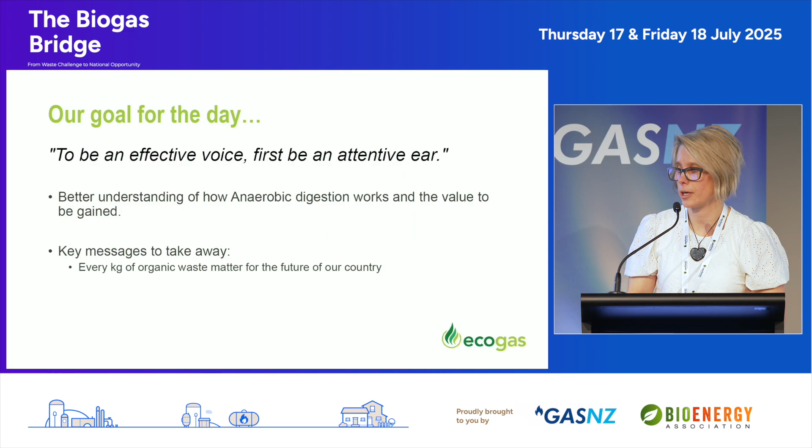And not many people will know this, but back in the 1960s, 1970s, there was a research group in Invermay down in Dunedin that was tasked by the Ministry for Agriculture and Fisheries to develop a technology that would convert agricultural waste to a vehicle fuel. And so New Zealand was actually the pioneers of biomethane into vehicle fuels. And there were people from Sweden and Scandinavia coming to Dunedin to learn. And so we were there, and then we lost the momentum and kind of took our eye off the ball.

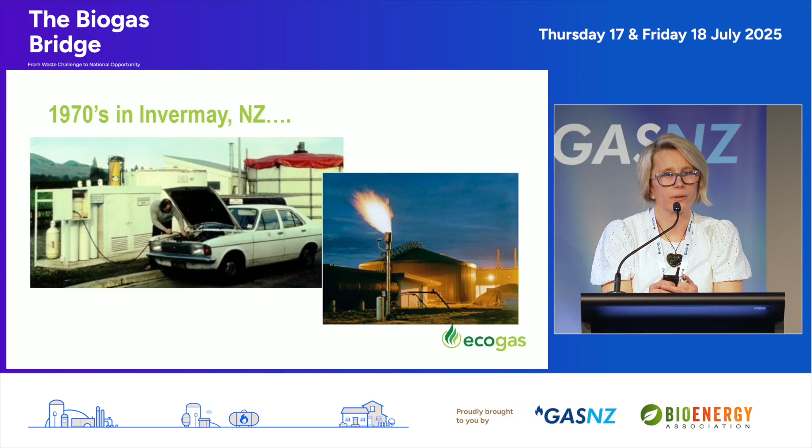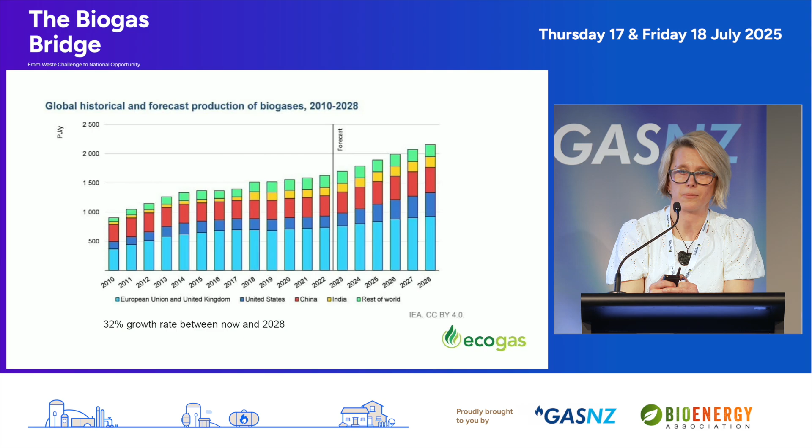And now we've got Denmark smashing the renewable targets in their gas. They're producing 40% of their natural gas currently from biomethane and heading towards 100% in the next 2 years. So it's something that we should be really proud of. This is where it started. So we just need to take the potential and run with it. And so enormous growth in anaerobic digestion facilities for the last really 3 or 4 decades. And why is it? And I think this is the main thing.

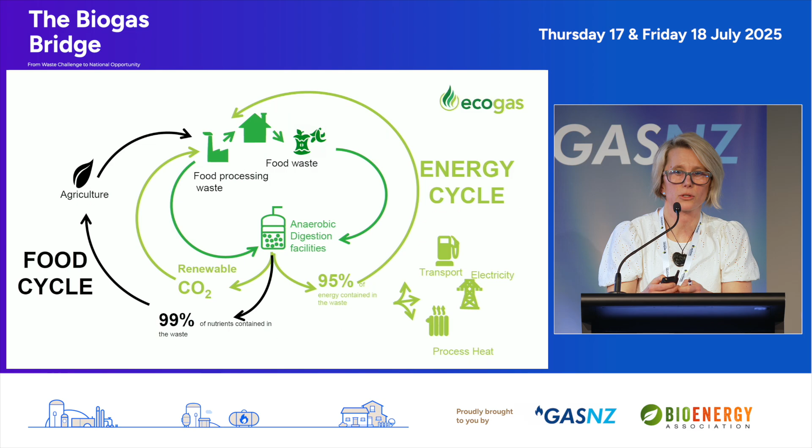What I love about anaerobic digestion is that it's a very versatile process. It can take a range of wastes that otherwise produce emissions and cause environmental damage, and it can turn them into energy that can be used for multiple applications. And we also harvest and reuse all the nutrients that have been trapped in the organic waste. And so what we are doing here is essentially going from reducing carbon emissions that would otherwise be produced in landfills when organic waste is deposited into landfills, through the elimination pathway that is composting, up to essentially an offset, because anaerobic digestion creates products that can be used to displace fossil-derived products like fertilizers, like fossil gas.

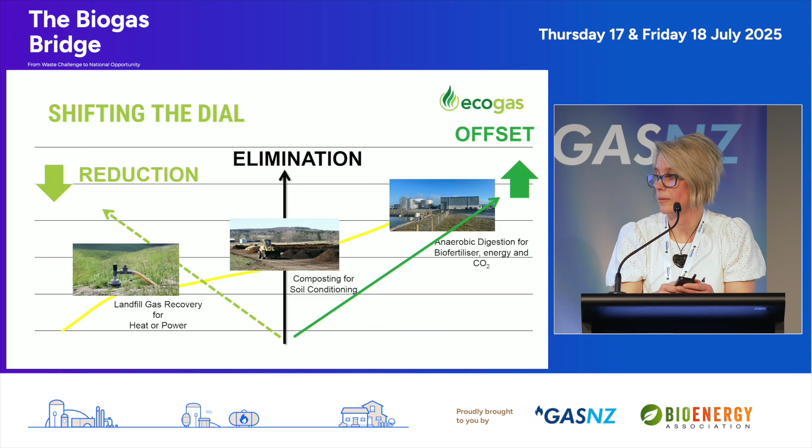And the last pitch for anaerobic digestion for me is that we use food for getting nutrients and energy out of it as humans. And anaerobic digestion does the same thing in a slightly different form. So when we are putting organic waste through anaerobic digestion, we are essentially maintaining the primary function that was put into food, maintaining it and preserving the dignity of food waste, even for food that is no longer suitable to eat by humans or animals.

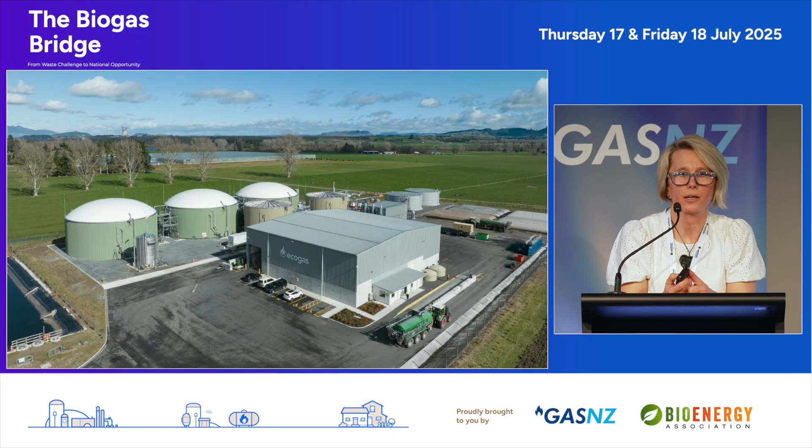And so what's the magic? This is Reporoa. It got mentioned here a few times. Tanks, pumps, steel, buildings, tractors. It looks like a big heavy machinery plant, and it is a manufacturing plant. But what's inside the machinery? That's what the magic is. It's unlike tractors and machinery that can be switched on, switched off. You can just fuel it with multiple sources.

Anaerobic digestion is a living organism. It's living bacteria that are converting organic waste into energy, and we need to treat it as such. As operators of anaerobic digestion facilities, we need to treat it as a cow, not as a tractor, because it runs 8,760 hours a year. We need to be careful what we feed into it to get the best outcomes.

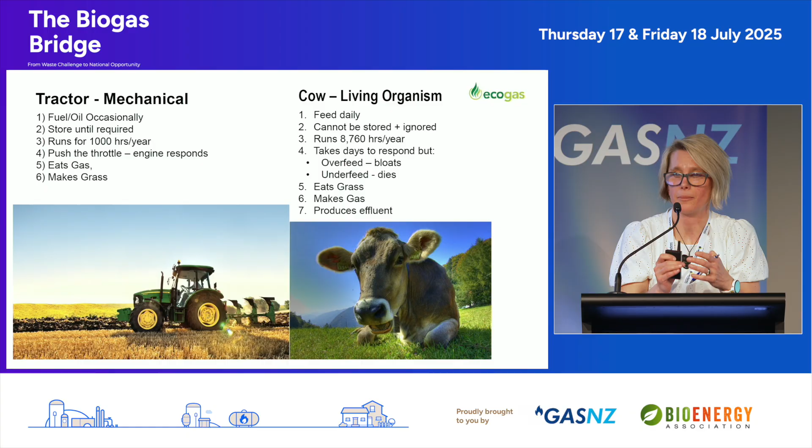It eats grass, it makes gas. There's so many parallels we can do with the whole cow thing, but the main thing is it's a living organism and we need to treat it as such. I'll dwell on this parallel for a little bit longer, bear with me. So anaerobic digestion is a 3-stage process that has to operate in complete symbiosis. Otherwise, the system gets overloaded.

And so if we look at the cow, what's happening in the mouth is the maceration. That's what we need. We need to get the food waste into a stage where it's in a slurry kind of space to put it through the anaerobic digestion process. And then we step through the different stomachs of the cow, and basically the first stage of anaerobic digestion is hydrolysis, where the complex organics liquefy and get broken down into more simple organics.

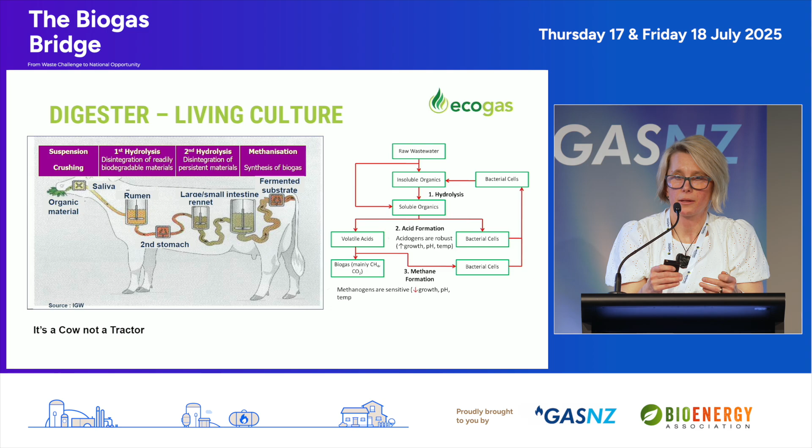And then the organics get converted into acid, and from the acid it goes into methane and carbon dioxide. And so the 3-stage process needs to be well balanced, and we need to be very careful what we put into our cows and our metal cows. And it is all about feedstock. So depending on what feedstock you have, it gives you how much biogas you have, what your fertilizer is going to be made out of. It controls how you process your feedstock.

Whether you are taking industry sludges or whether you are taking curbside organics from households. It also determines the pure economics of the plant. So, how much have you trucked your waste? How far do you have to truck your waste? What gate fee can you generate? So these are all very important aspects in an AD facility, and you need to understand your feedstock before you start to make sure that you've got all the boxes ticked, because it's essential.

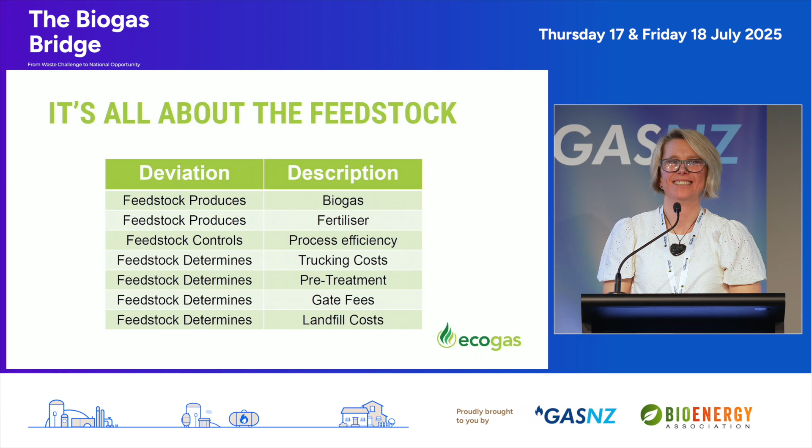So I'm a bit stuck on the feedstock now. I don't need to dwell on the point anymore, do I? Team, can you please move me? Thank you.

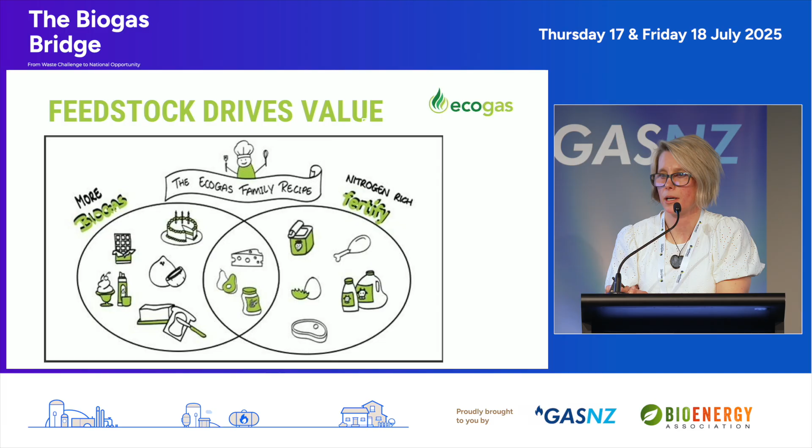Oh, great, fantastic. So we've put out this picture with EcoGas together. So there are different types of feedstock that do different things to anaerobic digestion. Fats are predominantly very good for making biogas. There is 3 times more energy per ton of pure organics in fats than there is in carbohydrates and protein. But proteins have got all the nutrients. They've got the nitrogen, the phosphorus, the sulfur. So you need to have a reasonably balanced diet for your anaerobic digestion facility to have a stable product and process.

So I mentioned it, fats are superchargers for production of biogas. So the likes of the dairy DAF sludges that come with lots of fats, they are fantastic sources for biogas. Food waste is kind of the second best, and then it drops down. Interestingly enough, animal manure, which has been used as one of the main feedstocks around the world, has actually very little gas yield.

But the main driver for digesting manure, which has already been pre-digested by a cow, is to reduce the environmental damage of manure. So countries like Denmark that have a very strong agriculture produce a lot of manure, and it was becoming quite an environmental threat for them. So they have chosen anaerobic digestion to essentially sterilize the product, make it more stable, and harvest the biomethane as a byproduct.

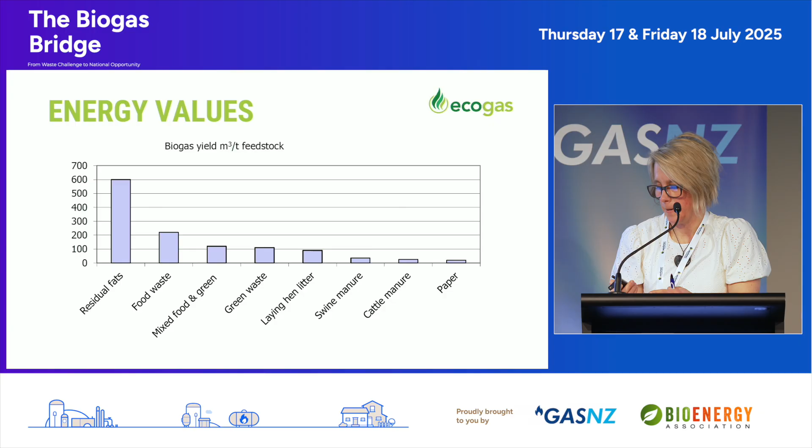So what are the AD superpowers? It's a very robust and stable process. If the plant is designed well, with the right organic loading rates and that kind of stuff, it can handle a lot. And especially once it's matured, we call it maturing the system. When you start an anaerobic digestion plant, you kind of start with a little baby cow, a little calf, and then you grow it, and over a year or two, the system matures, and then it becomes very stable.

It can handle really high strength waste, anything from dry feedstock to liquid feedstock. It's got very low nutrient and energy requirements. So the anaerobic digestion bugs only consume about 5% of the energy that is in the food for their own metabolism and their own growth. The other 95% gets converted into biogas. So it's an incredibly net positive energy process. The same with nutrients. They only consume a little bit of nutrients to replicate themselves. The rest stays in the digestate as a byproduct.

The other strength compared to other processing technologies is that it's fully contained. You'll see it in the Reporoa facility - the food waste essentially doesn't see daylight throughout the whole process. It gets unloaded inside a ventilated facility, and from then on, it all travels in pipes and tanks. So it's fully contained, it's best set up to manage odors, and it produces a high-value product, which I'll touch on a little bit later.

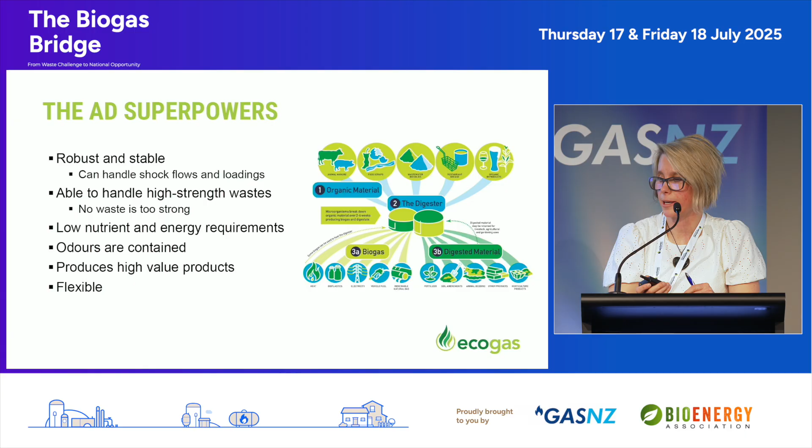The trick with digestate - it's a strength and a weakness in a sense - is that the nutrients in digestate are in a highly plant-available form. So once it's hit the ground, the plants can readily take it up and use it. What makes it susceptible is volatilization of the nitrogen. So if we were to throw the fertilizer around through splash plate application, we could volatilize some of the ammonia and lose it. So countries like the UK are actually putting regulations on how best to use digestate to make sure all the nutrients go into the ground and not into the atmosphere.

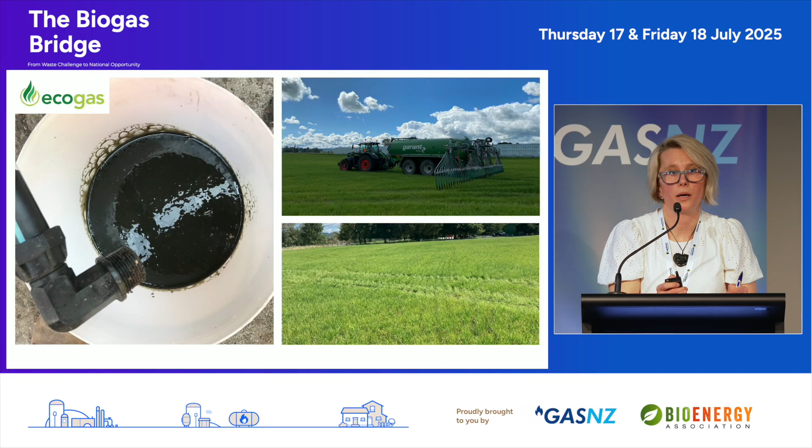So I mentioned the highly available nutrients. It's also got a little bit of residual inert carbon, which enriches the soil, and it's got undigested fiber and humic substances. The humic substances improve the water retention of soils and help to regenerate the soils a little bit better.

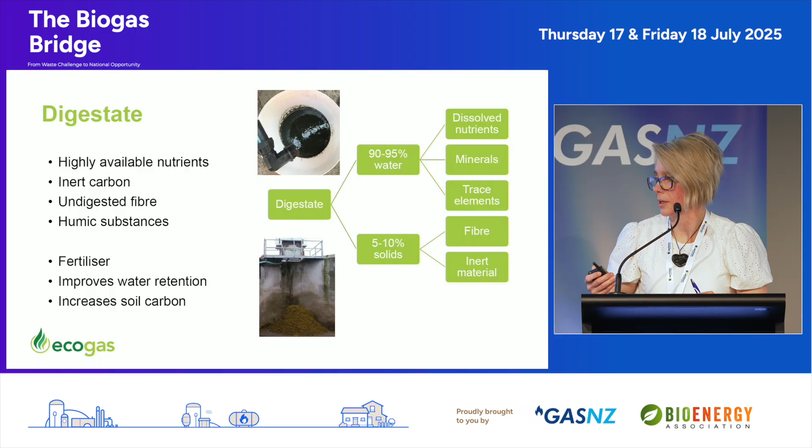So digestate is a slurry - we can separate the liquid portion from the solid portion. The solid portion, called digestate fiber, can be used for multiple applications. Depending on what feedstock you're feeding it, food waste in New Zealand, strangely enough, has got very little fiber - we tend to throw away mostly dairy and meat and not so much vegetable stuff. So the plant in Reporoa is harvesting very little fiber. If we start putting more garden waste through anaerobic digestion, you'll end up with a lot more fiber, because the bugs struggle to break down the natural fiber in the green waste.

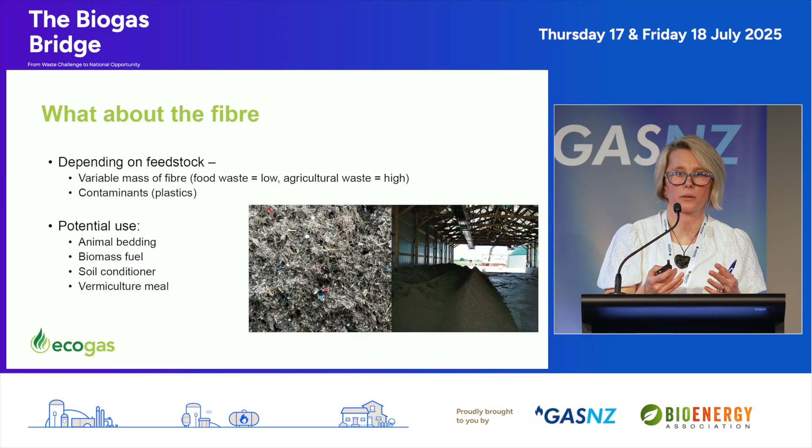And it can be used for multiple applications - it can be used as a soil conditioner, it still has good conditioning functions. It can be used as a biomass fuel or as animal bedding. It could end up being contaminated with plastics or other contamination, depending on what feedstock you're putting through your plant and what your separation efficiency is at the front end.

So it's a bit of a controversial space when we start comparing digestate and compost, because in my opinion both technologies need to exist for us to move into a sustainable and circular economy. Compost has got a lot more soil conditioning qualities, while digestate is a true fertilizer with highly concentrated nutrients. It's liquid, and the nutrient availability is a lot higher than in compost.

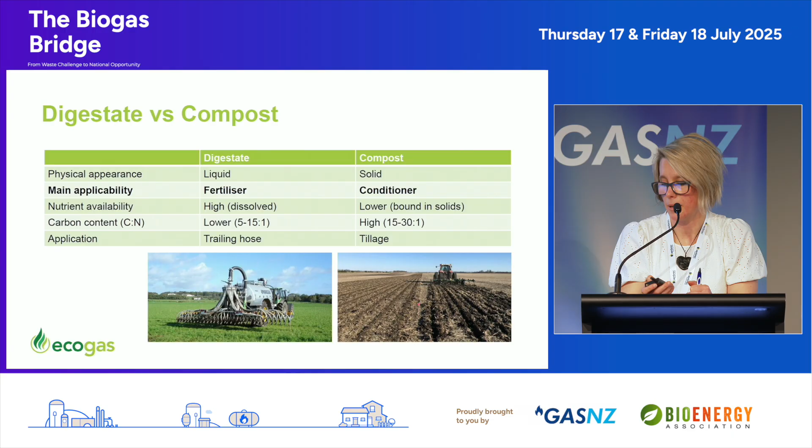The Bioenergy Association has put together a biofertilizer producers accreditation scheme - great work by Elena and Brian putting this together - and it's modelled on the British public standard PAS 110, which essentially certifies anaerobic digestion facilities based on the quality of their process, so that the product they make is actually a fertilizer and not a waste. So it decouples the digestate product from waste legislation, and in the UK it presents some monetary savings for producers. So this accreditation scheme has been put in place and it's now available.

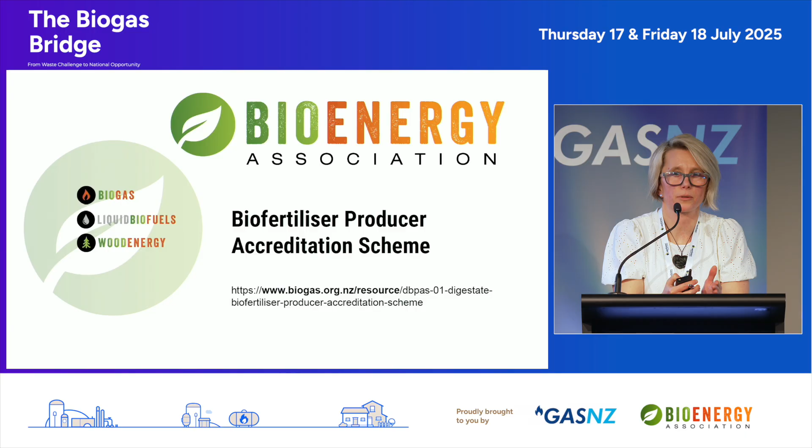So we have removed, I believe, one of the main barriers for putting digestate to agriculture in New Zealand.

On the topic of biogas, that's the other component we get out of anaerobic digestion. It's about 50 to 70% methane usually. The rest is carbon dioxide and some trace gases like hydrogen sulfide if we are digesting protein.

It can be used through many different applications. You can make electricity out of it, you can make heat, you can convert it into vehicle fuel, or upgrade it and harvest the bio-CO2. We've heard a lot about bio-CO2 today as well.

There are other emerging technologies that are looking to use biogas to produce ethanol, to produce methanol, to produce hydrogen. That's all sort of emerging in the European market, so we'll probably see quite a lot of development in that space over the coming years.

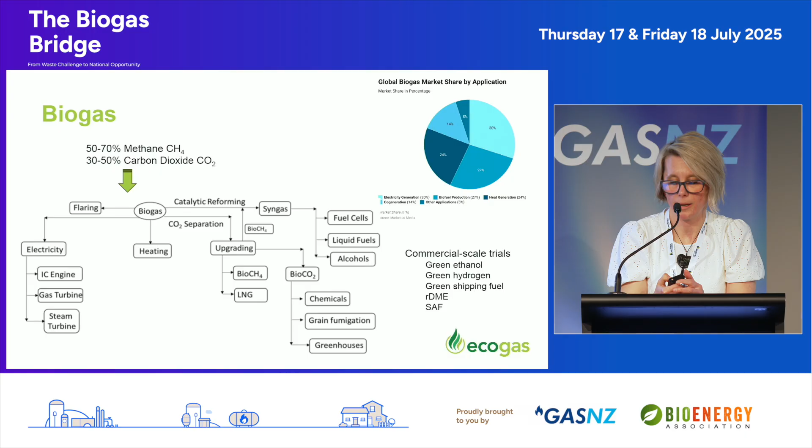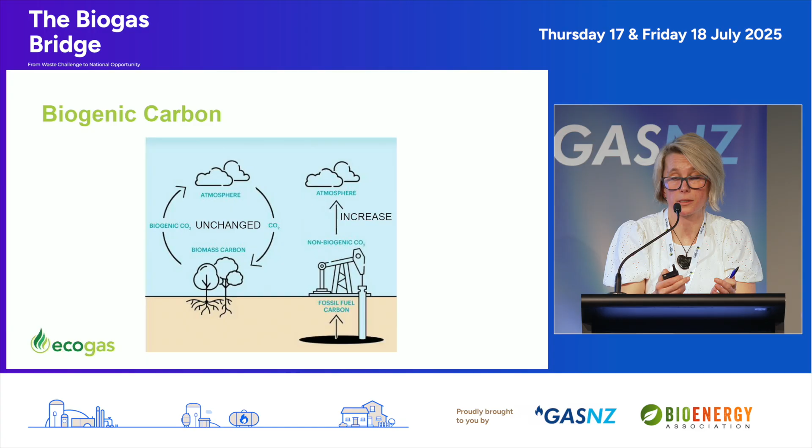I think Enzo is going to touch on the whole topic of biogenic carbon, and why it is that biogas should be considered biogenic and not counted towards greenhouse gas emissions. I'm not going to dwell on this too much, but I think this picture says it all. We are literally recycling CO2 at the upper level of the atmosphere, not pulling carbon dioxide from the stores inside the ground. This is why biogas is considered biogenic.

This picture is basically showing the different impacts we can drive by using biogas through different applications. If we were to upgrade biogas into vehicle fuel, we can make the most impact by displacing petrol and diesel in vehicles. The second best is replacing coal or natural gas in the industrial heat space, or producing electricity, which in New Zealand is highly renewable already, but there is definitely potential to displace more.

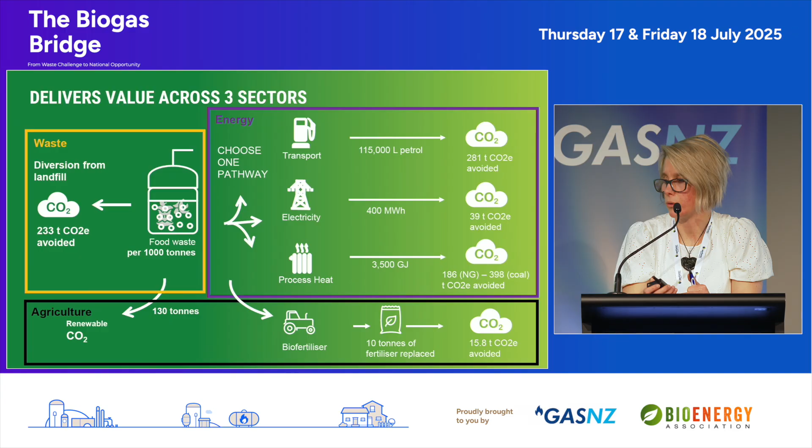This is a biomethane upgrading plant that Clarus and First Renewables have installed at the Reporoa facility. It's got potential to produce 160,000 gigajoules of biomethane per year, and the biomethane gets injected into the natural gas grid. The team at First Renewables and Ecogas have done a great job getting this project off the ground and essentially pioneering this concept in New Zealand.

So we've done the first step. It hasn't been easy by any stretch of the imagination, but we are building that knowledge in New Zealand and it's readily available. The byproduct of the upgrading facility is the bio-CO2, which in Reporoa is going to be used to supply the local Turners and Growers glass house, and Ben is going to talk about it a little bit later today.

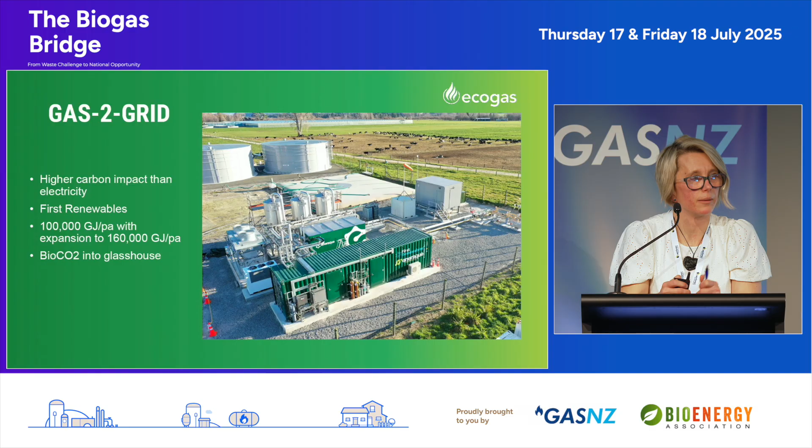I'm going to hand over to Richard for the next session, talking about how you put an anaerobic digestion project together. It's actually not the piece in the middle, it's not the technology itself. It's everything that is outside of the plant - it's your feedstock and it's your products.

A key to a successful AD project is making sure you've got committed feedstock of known quantities and qualities for a reasonable period of time, and that you have secured an outlet - a sustainable and long-term outlet for your products. Those are the key pieces that anyone building an AD plant needs to consider and make sure they tick those boxes.

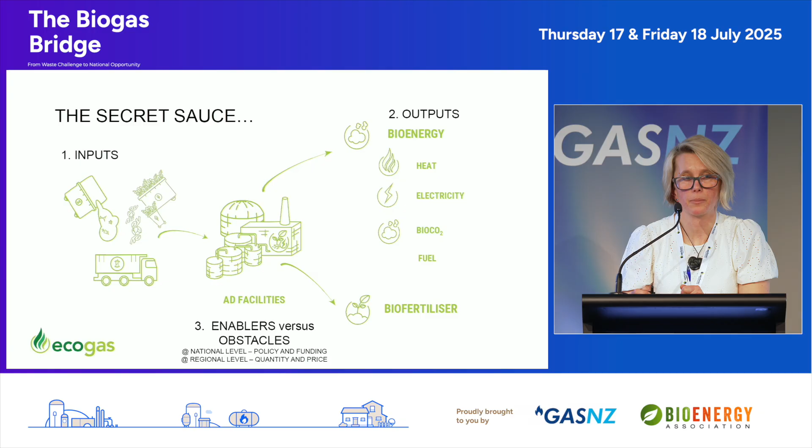We've heard about the enablers and the obstacles. At the national level, we do need policy help. At the regional level, we just need to work together and partner to get those projects off the ground.

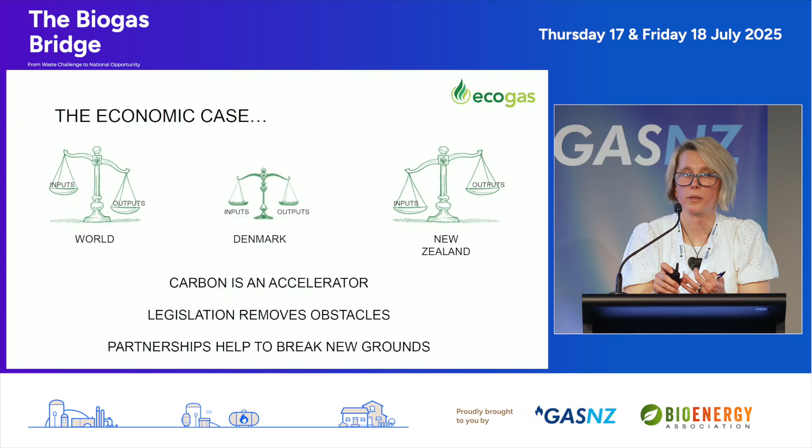I feel like I'm stepping on Richard's toes now, but I'm going to mention it anyway. In New Zealand, a lot of anaerobic digestion facility projects will stand or fall on the feedstock. As I've dwelled on before, it's the gate fees and the avoided landfill disposal cost, or other disposal cost, that are currently carrying the business cases for anaerobic digestion projects in New Zealand. That's because the value of the products, being biomethane and digestate, haven't been fully recognised in New Zealand yet.

So it's a very market-driven approach. We haven't had the legislative support so far, and I suppose one of the benefits is that we will only ever build AD facilities that are fully economically viable, and we will avoid perhaps some failed projects in that space.

There was an era a couple of decades ago when there was a whole debate about producing feedstock for AD facilities versus food. Given the fact that our projects rely on gate fees, I don't see that happening anytime in New Zealand.

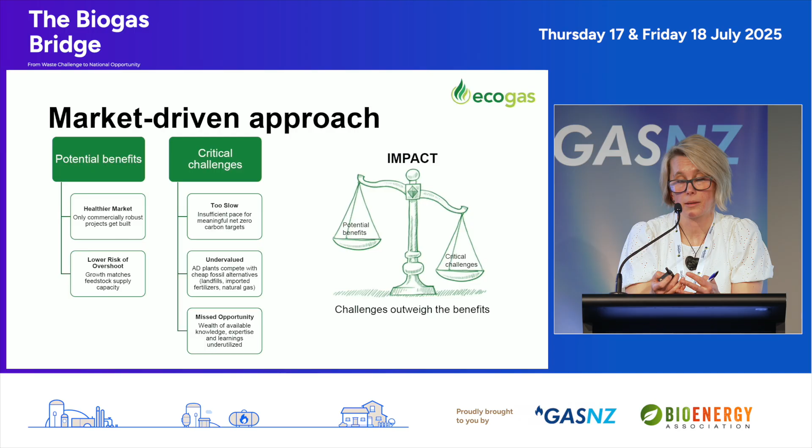But the critical challenge is that it's very slow development, because you need to compound the feedstock to make an anaerobic digestion facility happen, and the products remain undervalued. So I think I'm going to pause here and hand you over to Richard to talk more about the economics.